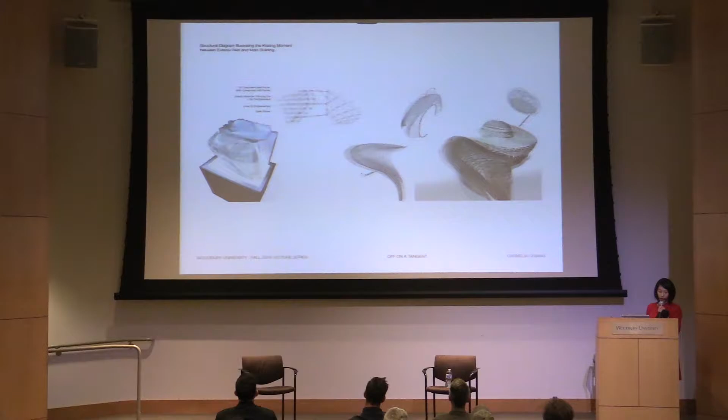So in 2014, I was invited to do a group exhibition called Artivism. We were to showcase our work without any specific common theme. So I thought I would just continue my earlier research, but this time to simplify it.

So this was the original model, and I produced a set of physical models, and every single one of them was to trace back to the original and to capture the essence of one moment, whether it's elevating from the ground or implied spherical volume or multi-level with a small footprint. But I realized those moments are almost inseparable. It just kept happening in every single model that I create. And there are probably an infinite amount of possibilities to create objects that fit the same criteria.

In terms of documentation, instead of drawing the construction of the objects, I decided to document the shadows they created. The flattening of the object somehow shows more depth and can be used for spatial analysis. Since there are infinite possibilities to achieve similar effects, there's no real reason to settle on one if there's no real constraint.

So in 2015, I was invited to do a co-show at Design Matter Galleries with Jeff Morto. And this time, the time and the budget constraint led me to find a way to analyze them so one of them can be realized. And this time I worked with my partner, Jeff Guducci, who also has an architectural background, and his focus of work is more object-based and in the construction spectrum.

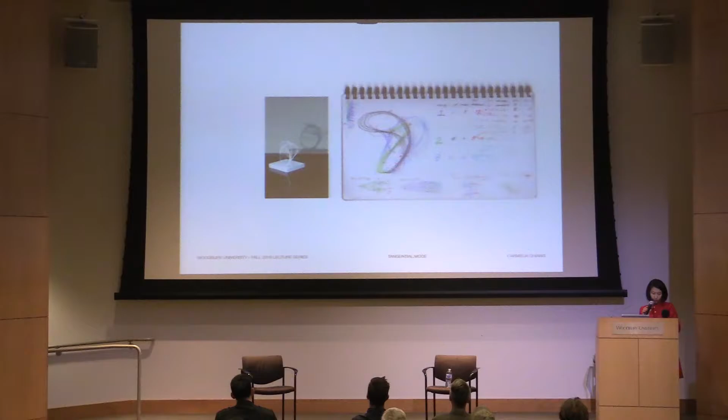So with no budget and 6 months, we identified the one that can implement a somewhat systematic approach as a starting point of the installation. We understand it is almost impossible to construct a compound curve without any framework. But we are happy to accept what comes of it, so that this installation stays truly experimental. We have dissected the intrinsic model into 3 strands, we identify where the strands need to meet and what direction they're going. In turn, we've shifted our focus from the overall form to the key moments and mechanisms that allow the form to happen.

So here's some process and production photos to show how the strands touch the ground, and the design process of the joint, which we call the O-snap connector. And then finally, the anchor that stabilizes the whole object, which is crucial when you have a big and heavy object up top with a tiny footprint.

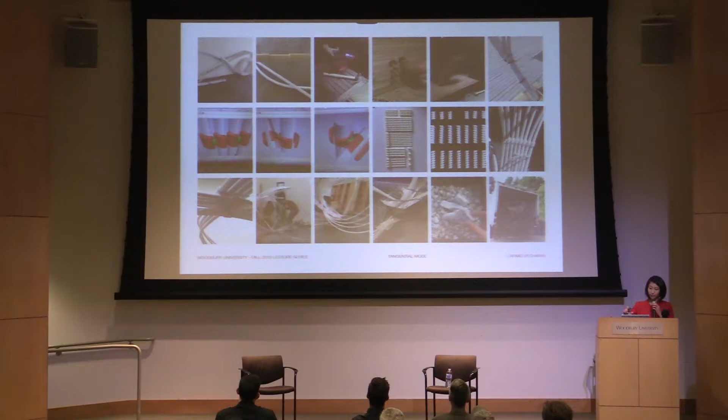And here's a diagram of our O-snap connector. This is what allows the kissing moment to happen within our installation. We have looked at multiple PVC pipe connectors in the market, but none of them would allow us to have custom rotating angles or joining different diameters of tubes or joining other connectors. So we design our own and then we 3D print them.

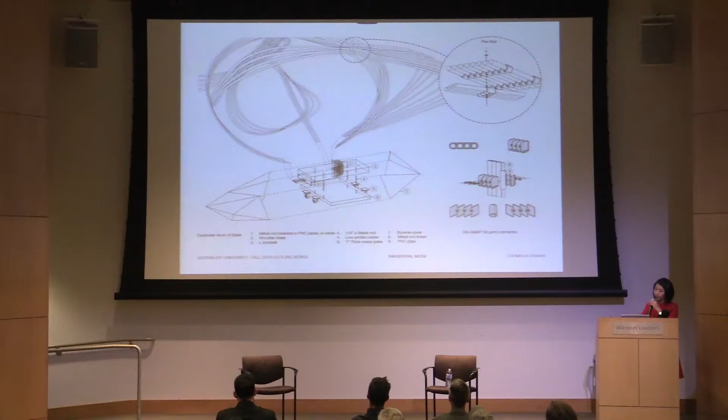Okay, so I was very fortunate to have worked at Morphosis. Not only did I get the opportunity to work with a group of talents from whom I've learned a great deal, but also I got to work on a 66-story skyscraper when I was fresh out of school. Another fortunate thing is that my personal interests are aligned with the project that I was working on. The exterior facade is expressed by the folding language and the expression of lifting off the ground, and there are multiple tangencies within the project.

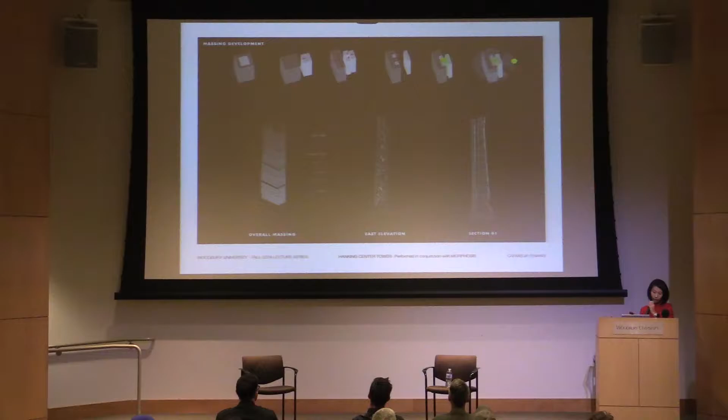The program is retail at the plinth level and office. So it's really blurry right now, but this is the plinth level, that's retail, and then there's office in the tower. It is the tallest detached core tower in the world. The diagram up top shows how we challenge the conventional design of towers by pulling the core outside the building. It's almost like we're building two towers instead of one, and these two towers are constantly tangential to each other.

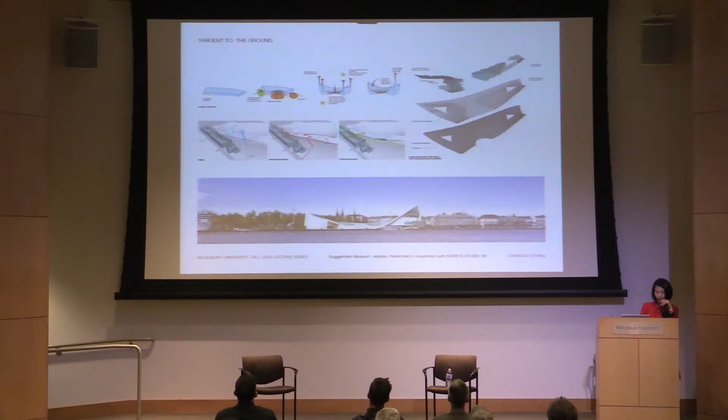So in this proposal, instead of elevating off the ground, we've looked at using a surface to be tangent to the ground. Having the building envelope do most of the work, whether it's acting as a connecting tissue or the needs for programs or structure, it is all embedded within this tangential surface.

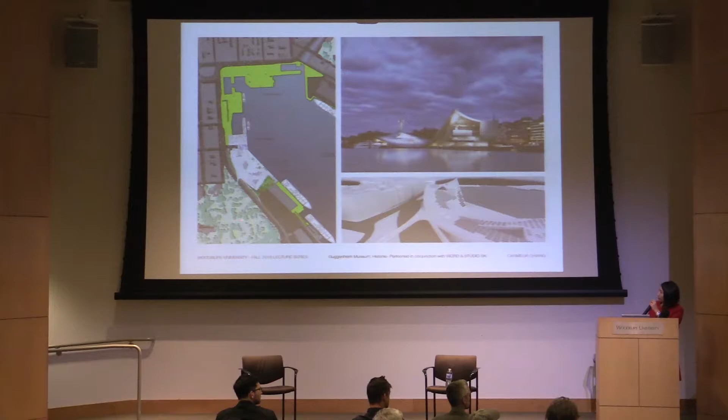And here's an image showing how the building envelope is touching the ground in the waterfront. And we have a bike path that's also tangent to the building, connecting to the adjacent park and to the rest of the city.

This is another competition that we've worked on, the new Museum of the 20th Century of Berlin. So the site is in the Cultural Forum in Berlin, where on the north is the Philharmonic Concert Hall by Hans Scharoun. And on the south side is the New National Gallery by Mies van der Rohe. And in this project, we use tangency as a trajectory, a factor, a force to create reactionary moves.

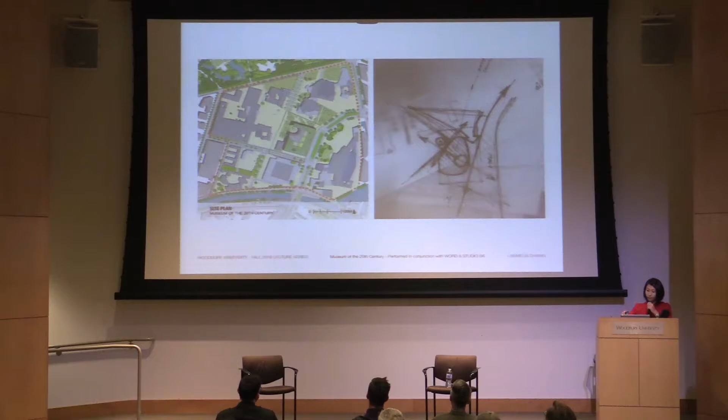Besides the two prominent works of architecture on the north-south ends, there's also another constraint, which is this 100-year-old tree in the middle of the site that we have to reserve space for its canopy diameter. So we've elevated the building off the ground to allow for pedestrian circulation on the ground level. And we use a cone-shaped void that cuts for the tree canopy.

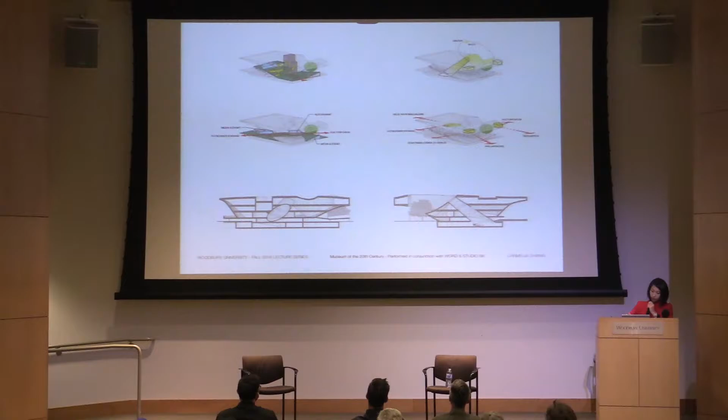And then within this void, we have another void that's cut along the surface to bring light in to become a light well. So the building reacts to the site constraint, and we exploit the opportunity to bring other elements to the building. And this elevation shows the Mies building on the south end and the Hans Scharoun Philharmonic on the north end, and the circulation on the ground level.

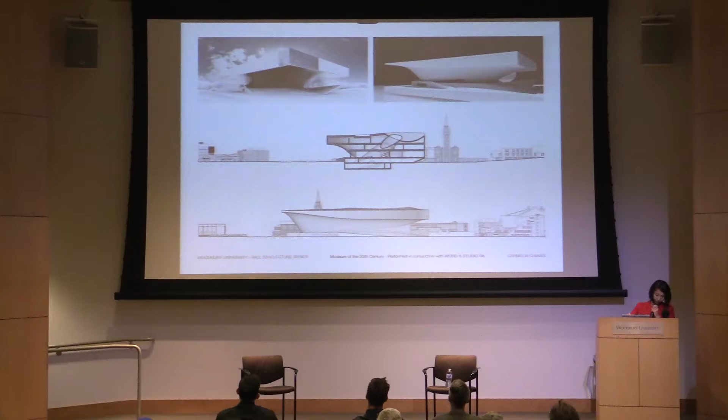Okay, so next project, instead of showing you the final results, I'm going to share the design process with you. These are some schemes for a small jewelry store in downtown LA. It's called Vrai & Oro. In fact, this is the smallest project that I've worked on to date, and it's built and demolished. The design process is always a negotiation between the clients, the needs and the wants, and the budget and time. We've gone back and forth with the client in the process.

They wanted to create a new interactive shopping experience where the conventional way of display countertop is not desired. So we created an experience where we use their product as almost an exhibition instead of a retail experience. But then later on, they changed their mind, and they wanted the conventional retail experience again. So then the counter is brought back in, and there's no unconventional way of doing it. So we just need a countertop basically.

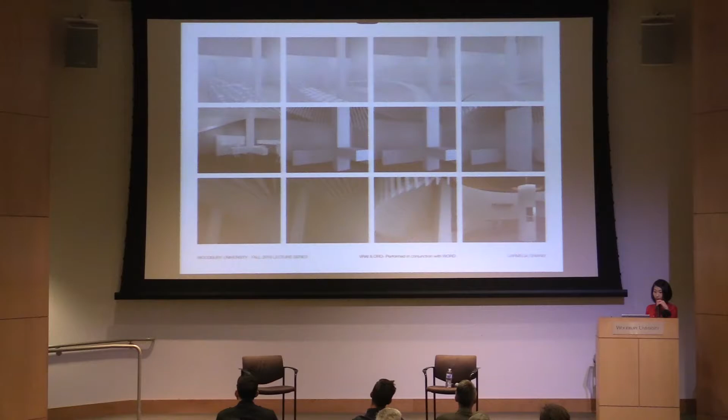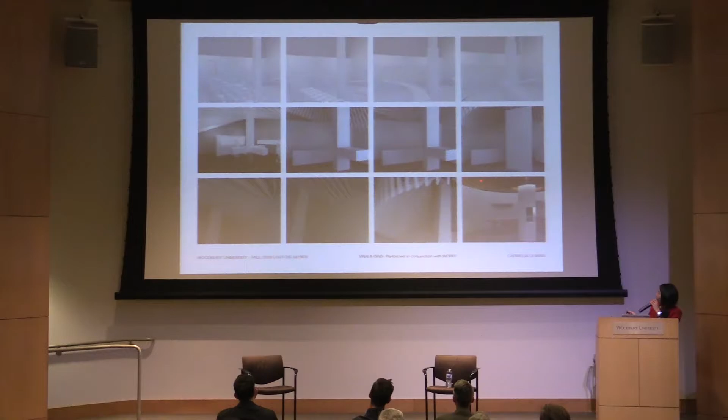And then they also wanted to warm up the space with a ceiling in wood. So we're studying multiple ceiling schemes, going from a plane to a ring that's made of rod, to a ring that is made of 2x4, or a folded ring. And then finally, we go back to the study of a single plane that is a ring. And then, of course, eventually, there's no ceiling at all due to the real-world constraints, time and budget.

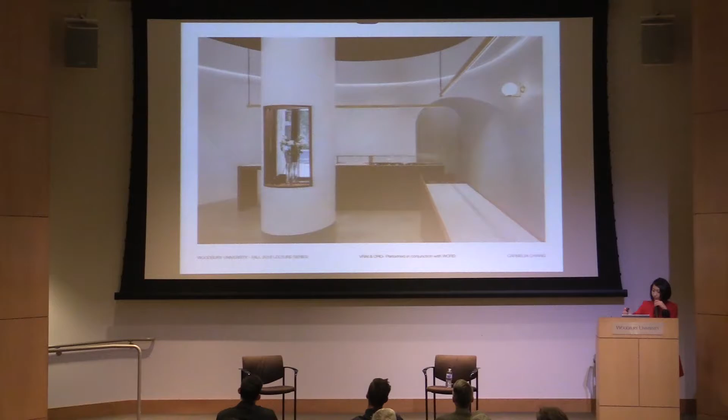However, to represent the desire of manipulating the ceiling, we added a soffit along the curved wall, which was inserted to divide up the back of house and the front of house. The threshold between these two programs is created by an arc-shaped void that's tangent to its surface, creating tangent to zero. So here are some photos showing the use of a few different materials to warm up the space, and the tangent to zero soffit.

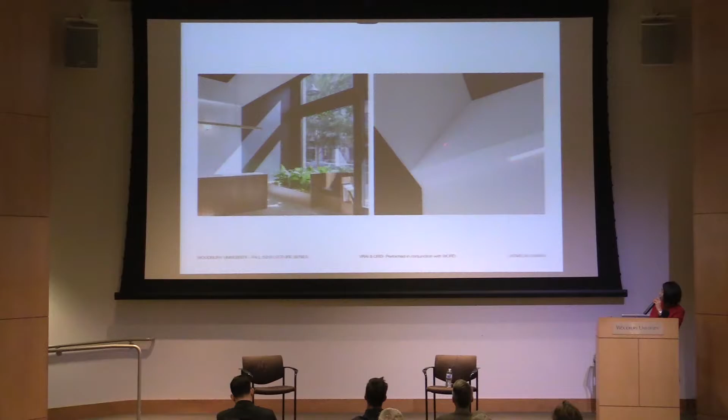And showing the details of the ceiling soffit along the curved wall. So to that note, when it comes to details like this, especially on a curved wall, craftsmanship is essential. We are very fortunate to use my partner Jeff Guducci's service, who has his company Design Debris Lab, to project manage this construction, or else we wouldn't be able to achieve clean soffit details like this.

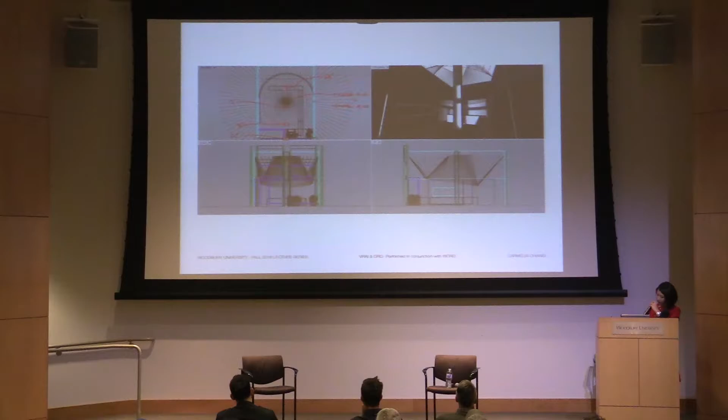So this is how it would look like if it was built. So even though it wasn't built, we thought it would be a takeaway for our future projects. So fast forward to this summer, we worked on another competition, which I thought would be good to bring back that folded ring. But this time the scale is 10 times bigger.

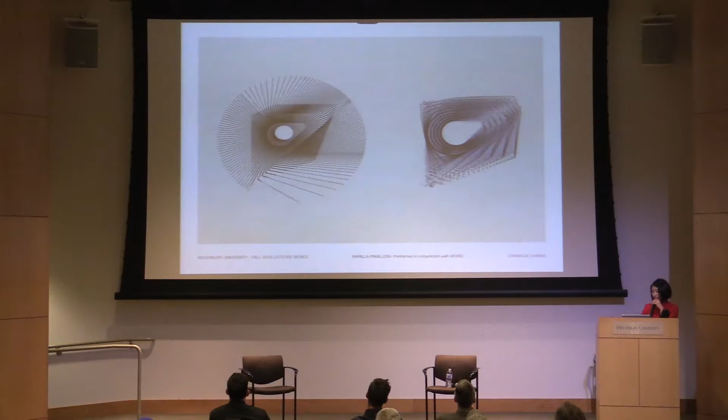And here's the concept diagrams for the competition for Barilla Pavilion, Barilla, the pasta company. We have looked at using the folded ring to cover almost the whole site, having the folded line tangential to the program arc line. The program asks for a pavilion that houses a private art collection, exhibition space of the company history, an experimental kitchen, and a restaurant that's open to public, laboratories, and also a community space that's open to the public 24/7.

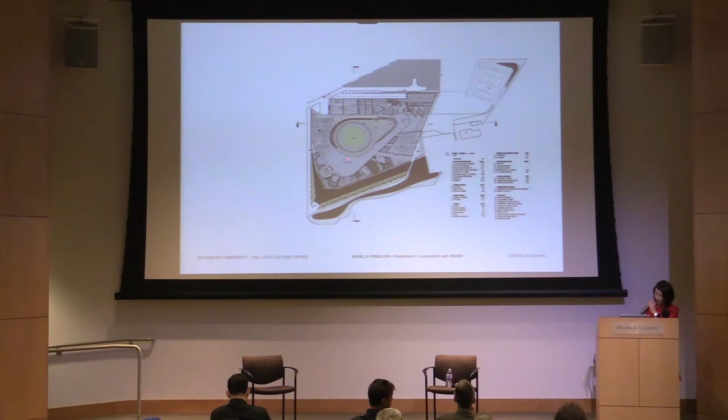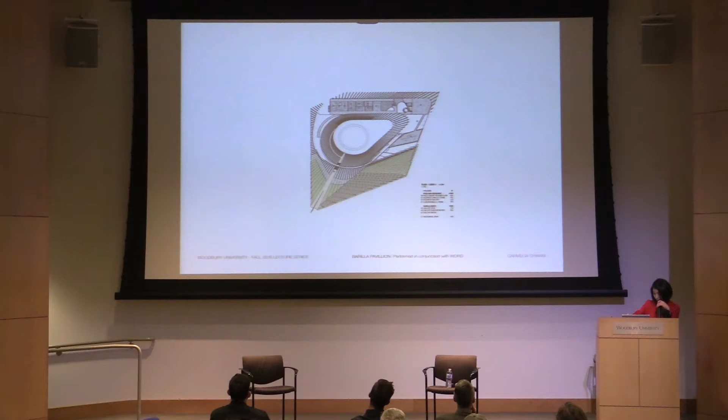So the folded ring is broken down by structure, which are concrete frames connected by ring beams. When the folding angle decreases, the fold line rises to allow for second and third story. So the second story was laboratory, and the third story here is open air to allow for natural ventilation.

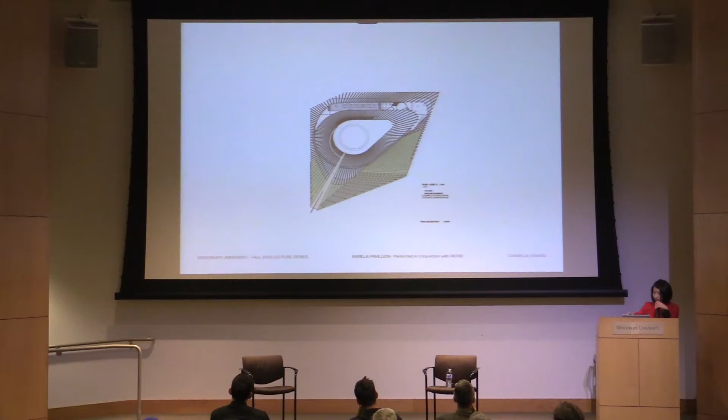This is the site that we were given in Parma, Italy. So this is the existing Barilla factory, and they have a sculpture park outside. This is part of the parking for the employees and visitors, and this is the main entrance. And this is what we propose.

Using the building as landscape, allowing a path to meander up and down the building. So this is the path from the entrance up and down the building, arriving at the central communal space, surrounded by arrays of solar panels on and off the building, adding additional communal program out to the field.

Here's the render at the exhibition gallery, where it shows the history of the company. The spatial quality is fine-tuned by the louvers, skylights, and the openness to the central plaza. And here's the image that we submitted for the competition, showing Barilla history.

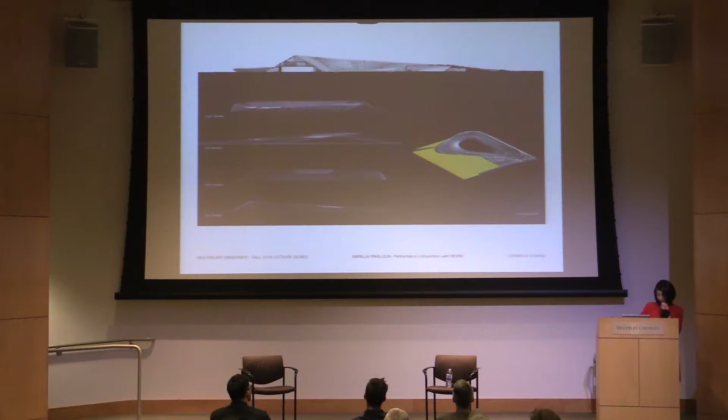The section here shows the relationship between the folding angle and the allocation of program. The elevation shows the building is viewed as landscape, the subtle rise and fall of its structure, and a bird's eye view to show the exterior of the building. An image to show how we envision the central courtyard being truly activated by the community 24/7 with this big circle community table that can seat 330 people at a time.

Okay, so I've been using the word fold quite often, but none of it is actually folding a single sheet of material, and that's because of scale. So this project is shifted in scale, literally folding a single sheet of material to become a space, a habitat for plants. The project is developed by the company I partnered up with Gary Ann and Jeff Guducci. It's called Dot Dot Dot, a lifestyle company.

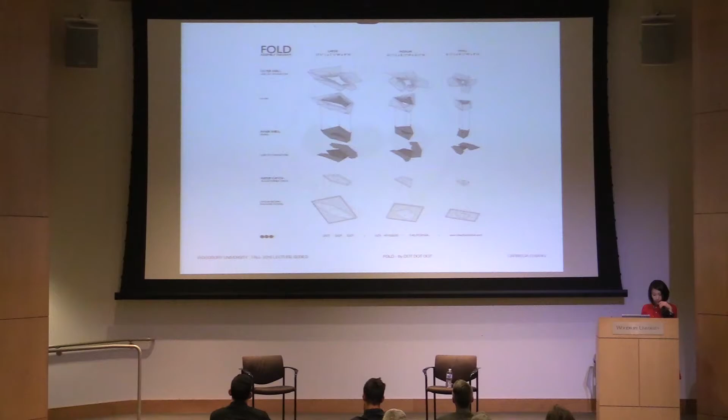And this assembly diagram shows the outer shell and the inner shell of the planter, which were sheet metal, laser cut and then hand folded, with the water catcher down below the inner shell that catches water. And this water catcher is vacuum formed out of one sheet of plastic, where the negative of it becomes packaging material. Because we are very conscious about our environment, in every step of our design we try to minimize waste. And here's the full planter assembled.

So last semester, we were invited to do an exhibition at the Wedge Gallery. It's called Orbital Light. For those of you who didn't get to see it in person, here's a video to show what we did. Orbital Light is an installation consisting of the juxtaposition between points and tets, both depicting the matter on the planets through light. Tets stand for tetrahedra, the basic geometry of a crystal structure like copper sulfide, which is a substance found in minerals. The form of the tet is a magnified form of its crystal structure, whose pattern is etched with copper pigment on the lens to symbolize its natural transformation.

Points, a light box that depicts cities at night, from a NASA project that captured human settlement from space for the first time at night. We have chosen 1 to 2 cities from each continent using the scale of 1 to 75,000 to 1 to 100,000, documenting cities at night through the use of light.

So here's the effects of the installation. For those of you who have been there last semester, you can tell me the effects, what you guys feel. And this is a physical light box, which is a 2 feet by 3 feet case, capturing 1 to 75,000 to 1 to 100,000 scale of the city.

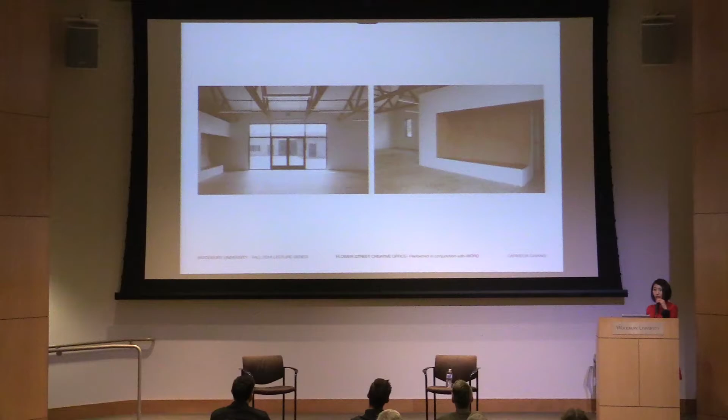Again, when it comes to a small project like this, details are essential. Our wish was to have no cap at the corner, really letting us see how the lines meet at the corner, but we weren't lucky enough to have great craftsmanship this time. So we had to revise our detail multiple times to allow for the lack of precision.

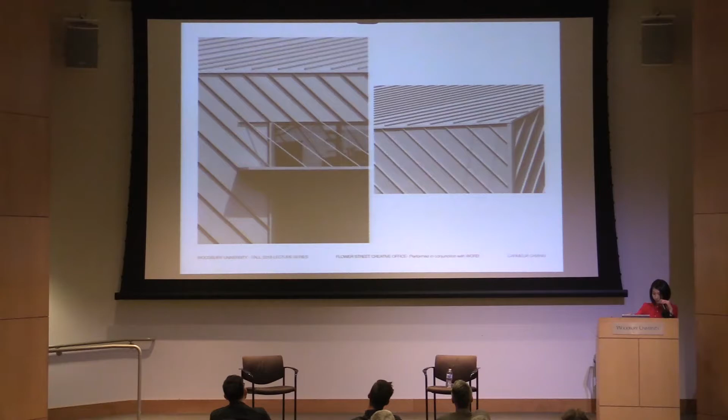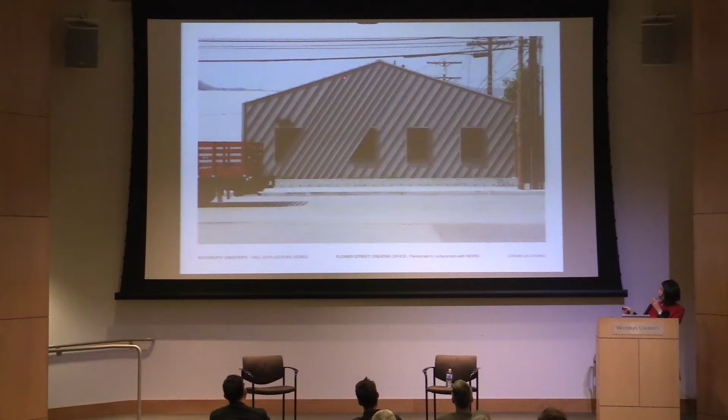And this shows how we use graphics even on the tension rods here, so that when you stand in front of the front elevation, you can see the patterns going in the same manner. And the strip that was wrapped around the building cuts the facade and also cuts the window.

Okay, so the last project I'm going to show today is more contextual. It is a 131-room boutique hotel in Macau, and the site is located next to a historical heritage UNESCO building, which is a vernacular Chinese residence built in the Qing dynasty. The features of this residence are its brick facade, the tile slope roof, and its courtyard.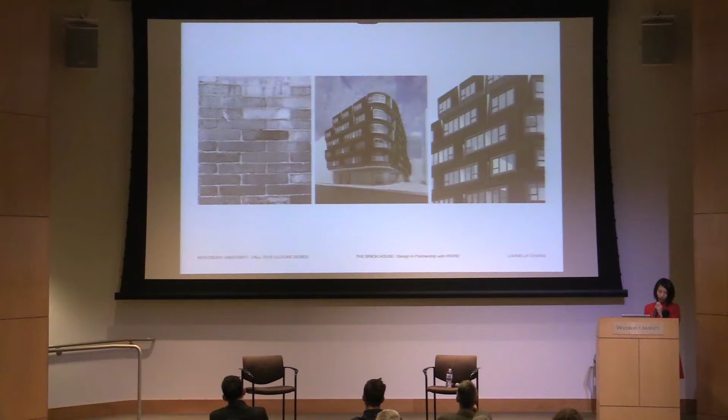So I thought, what if we also have a brick facade? Instead of using the same brick, we create our own version of brick, a scaled-up oblique brick. We play with the distance between each brick, each perforated metal box mimicking the brick, allowing it to look like brick, and adding the chamfer edge to lighten its appearance. In this elevation, without the distraction of material and color, you can see the pattern of brick begin to assemble.

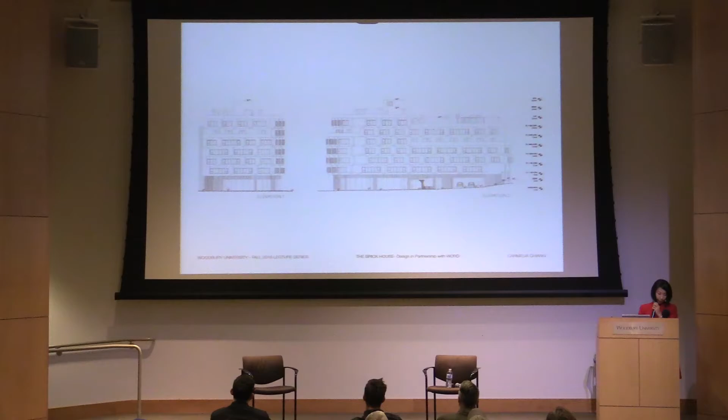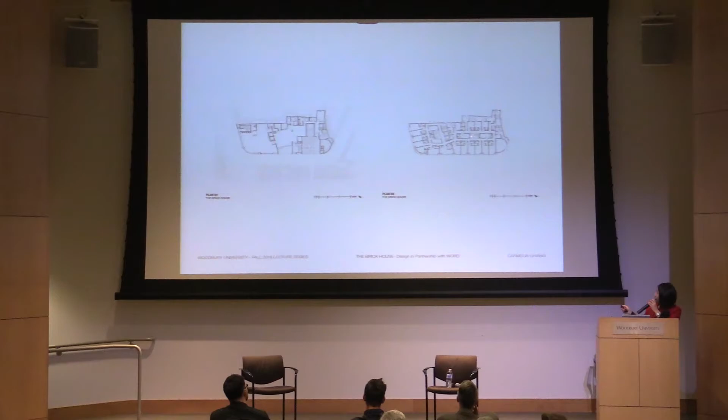So the program on the ground is retail on the front end, hotel lobby in the middle, and the rest are all service. And the typical floor is as many hotel rooms as possible, which is quite difficult, because how can you fit as many as possible and still leave room for architecture? So we have expanded the typical double-loaded corridor into 2 corridors, adding a courtyard space in the middle of the corridor, having 2 rooms adjacent to it.

So here's the courtyard. The courtyard uses the vernacular features, but the boundary of interior and exterior is expanded through the use of glass. We'd like to create an experience in the hotel corridor that is open, filled with light, instead of a traditional double corridor with rooms on both sides, lit artificially.

So I'm not sure if this actually works. Let's try it. So this is how we explain to the client why this is needed. Doesn't let me move.

Up there. So this is the courtyard where we have a lot of vernacular Chinese elements in it, looking up to the 5 stories above.

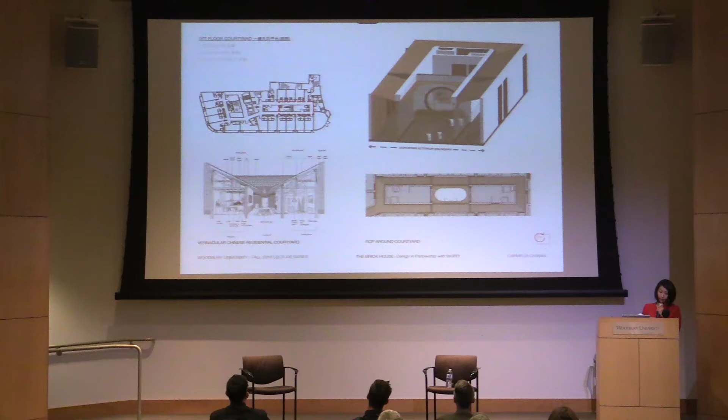So as for the lobby, the mentality of courtyard remains. It is considered as a void that travels through inside and outside of the building. Having the front glazing set back, the exterior courtyard is allowed, and the interior courtyard is actually not a courtyard. But with the continuity of the geometry and the use of light and different materials, the effect of being outside can be created, where the void is tangent to the wall and creates sitting elements on the side.

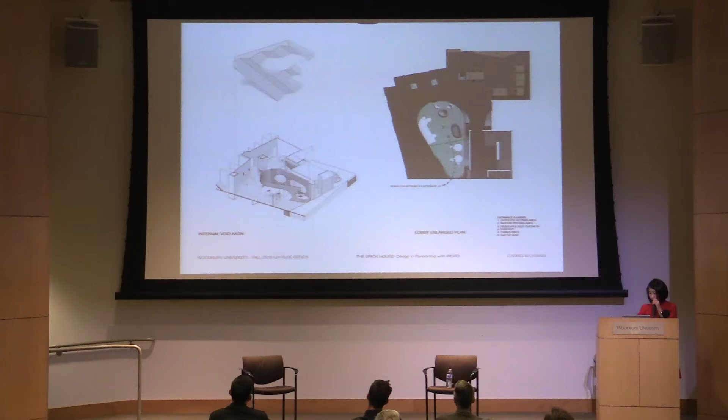The language of fold is used on the ceiling plane, creating proportions like the roof of the vernacular residence, as well as the feeling of being at home. Here's the render of the entrance looking at the courtyard. Here's the view of the lobby and the cafe.

So we're standing at the entrance of the hotel, looking into the reception area, and this internal courtyard that's lit by plenty of light, so the feeling of being outside can be created.

So tying back to the common theme of project versus practice of this lecture series, I think they are absolutely interconnected, inseparable. But the notion of your conceptual interest, the focus of your work, are absolutely affected by the trajectory of your office, which allows what was implicit in the earlier practice to become more and more explicit as work and experience accumulate over time. Thank you.

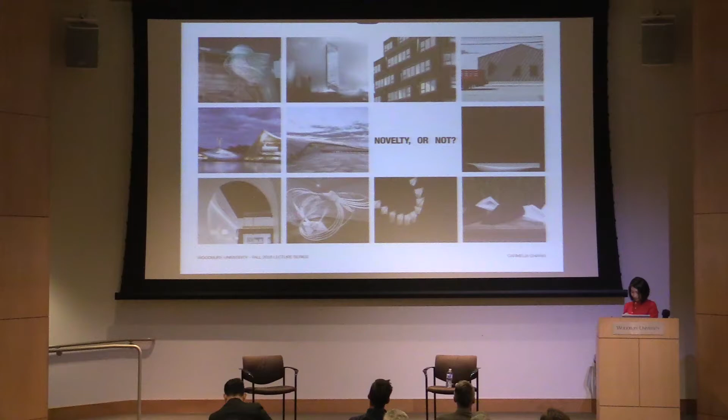That was great. Thank you so much. I think we're going to take a couple minutes just to talk very quickly about the presentation. I hope in the future we have VR lectures. We all need Oculus Rift headsets, right? That we can just press a button and go into space. I think it would be more didactic, right? In that way.

I'm going to start in reverse really quickly just because this last project I think is so fascinating. One of the things you talk about is this kind of material application. And so there's two things that are happening in this last project, which is the material finishes within the project itself, right? The kind of surface treatments, but then also the kind of, let's say, massing parti of the building kind of acting like bricks.

So is there a difference in your own opinion between, let's say, material application as a kind of interior surface treatment versus, let's say, disciplinary misbehavior where you're using the material in a kind of different way, maybe towards scale?

So I'm going to answer your question in less of an academia approach, more of a real world practicing architect's approach, where a lot of us would think that it's us versus clients, but in my case, I actually learned a lot from the clients. I would always love to work as a team, and the client showed us initially what they expect, which is other projects they have done. And here's the package that they expect from the final results.